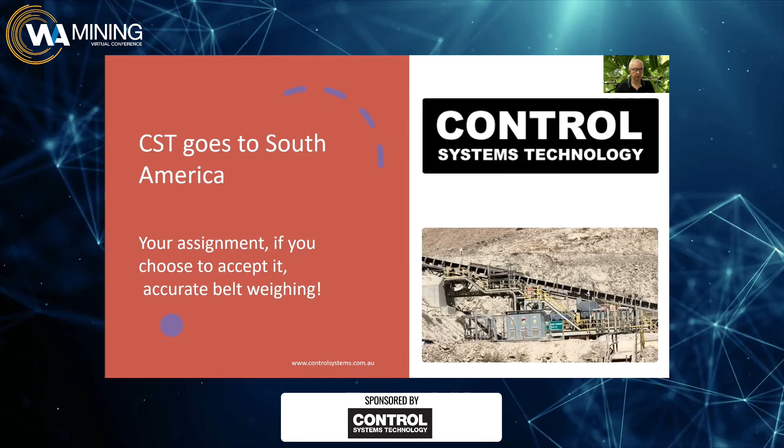On a recent visit to a copper mine in South America, we learned of an accounting problem at one of the many large copper mines there. The mining company had no confidence in their existing belt weighing equipment and asked if we could help.

Actually, as soon as I saw their conveyor, I knew they had a problem with belt weighing. Their conveyor was very long, with high lift, and the belt tension had to be very high and variable. A real nightmare situation for an accurate belt scale.

The mine personnel said that they were at their wits' end with the equipment. It was apparent that they were not getting any assistance from the supplier. We were invited to analyse the existing equipment.

The conveyor is 473 metres long with a lift of 71 metres, and due to a vertical curve, the belt scale was located 253 metres from the tail at a vertical lift of 25 metres. At the belt scale location, the belt tension is 31 tonnes. This is a very difficult location for a belt scale.

To illustrate the difficulty of the location, note that given the 1,000mm idler spacing, it takes 31 kilograms of weight on the conveyor to deflect the belt by 1 millimetre. Since the weigh frame only supports about 2,000 kilograms, this would represent an error of about 1.6%.

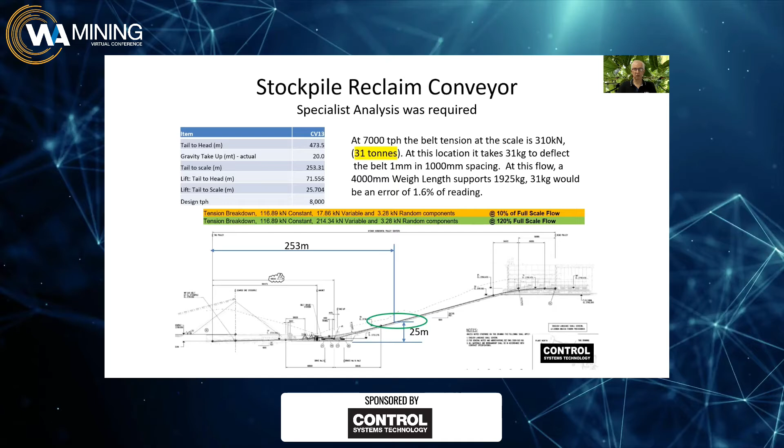The customer belief was that the belt scale had a bias or systematic error of up to 4%, and this is a long way out for a 0.25% system. So, as requested, we subjected the existing belt scale to our engineering analysis.

We interpret three components of belt tension: fixed, load variable, and random, and we interact them with three components of belt scale misalignment: fixed misalignment from the installation standard, load variable misalignment from weigh frame deflection under load, and random misalignment from roll out of round. Our calculated error was 1.7%, in the order of 10 times worse than the customer's expectation.

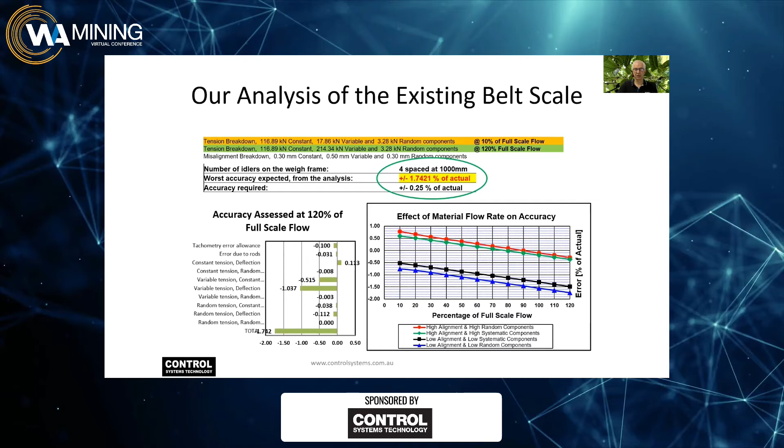We were also requested to design the alternative equipment, which actually had to be located even further up the conveyor in a still worse location, so that the existing scale could be compared. We ended up proposing a 4-idler scale, with each idler set spaced at 4,500 millimetres, some 4.5 times longer than the standard spacing on the conveyor.

This would be a highly unusual custom designed belt scale with a weigh length weight of 10 tonnes, 5 times more than the existing scale. The new unit, taking into account the weigh frame weight and the long idler spacing, is more than 20 times more stable than the existing unit.

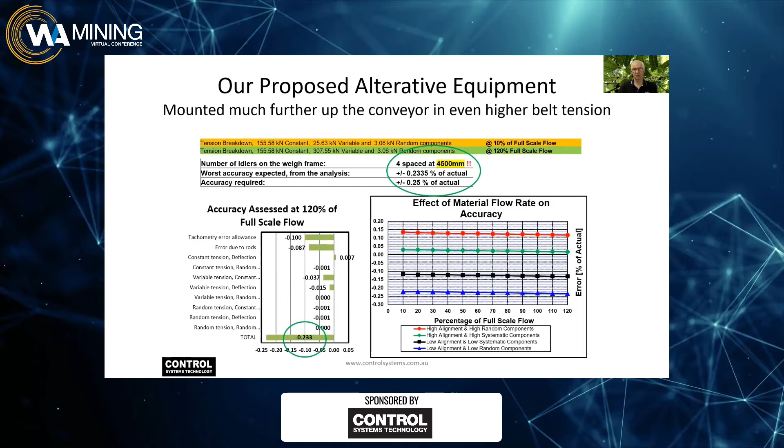But 4,500 millimetre spacing, how is that possible? The fact is that if belt tension is very high, then idler spacing can be very wide, depending upon roller bearing size, of course. However, CST has a patented design which facilitates long idler spacing by providing very good belt support. This is our close-spaced roller rack, or CSRR, as shown.

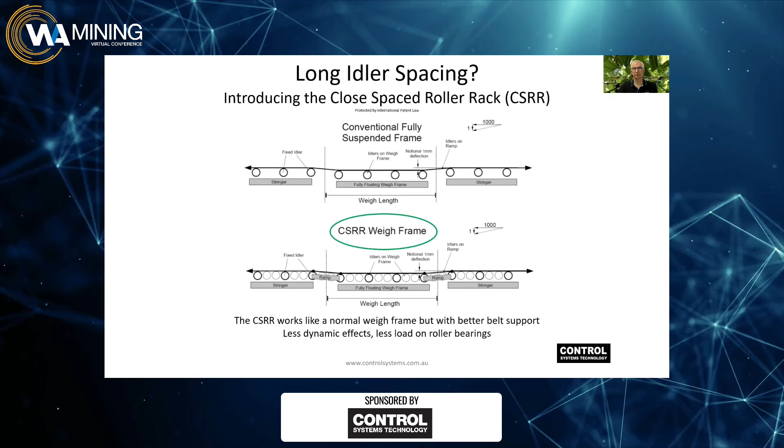The belt has extra horizontal rolls between fully winged sets, in this case spaced at 4,500 millimetres. The CSRR combines the benefits of good belt support and long equivalent idler spacing. At the same time, wing roll loading is acceptable, and we have years of experience to show that the system works well. And this is the unit we proposed to the mining company.

A relatively large belt scale with 10 tonnes of calibration mass and a weigh length of 18 metres. Definitely a sizable unit. It has to be supported on 4 load cells, each with its own little hip roof. All of the 4 full idler supports has 2 calibration masses of 1.25 tonnes each. We were able to get an order for this equipment.

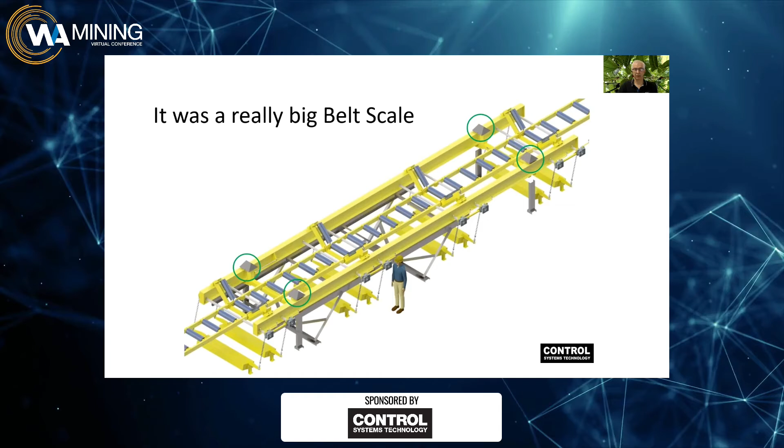However, we had already been thinking about ways to improve the design. The first proposed weigh frame design had very low deflection at the ends, but more deflection near the middle, and the steel sections were likely to make maintenance difficult.

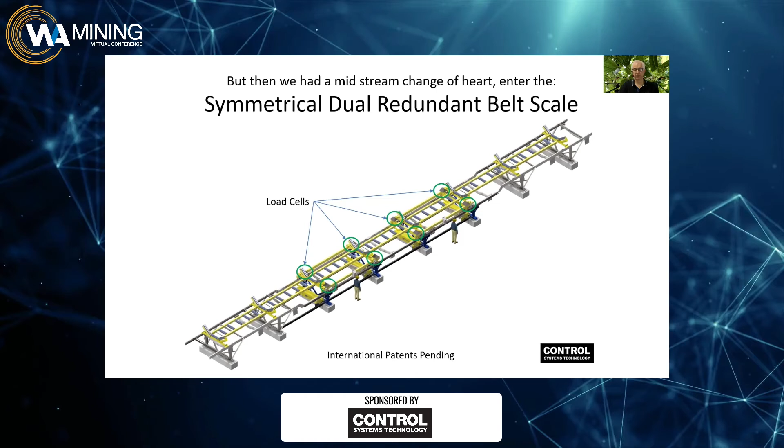So we revised our design midstream and ended up providing a symmetrical pair of belt scales with very small deflection at the far ends and less deflection in the middle than with the previous design. Our system now had 8 load cells instead of 4 and could be configured either as one scale or as a dual redundant pair. So the alternative design is much more open and maintainable.

It has the calibration masses applied directly to the idler sets. Each mass is split to allow a 50% linearity test. We did not linearize against static mass. We only linearity test to prove weigh frame health.

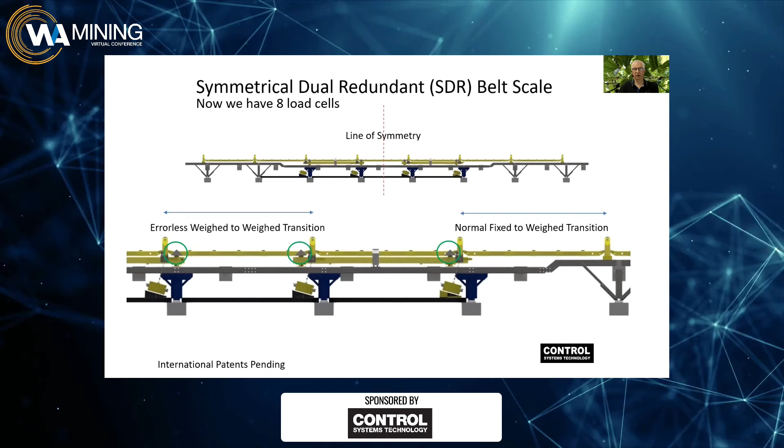The design has the added advantage of offering dual redundancy, and the weighed-to-weighed transition between the 2 weighframes is an errorless internal force. The CST electronic system is able to accept 8 load cells, either as 2 individual inputs or grouped as 1 belt scale.

We retain the option to configure the system as 1 belt scale or a redundant pair. As you can see, on our electronics, there are 2 independent sets of terminals for the 2 weighframes, and each is also able to have its own tachometer.

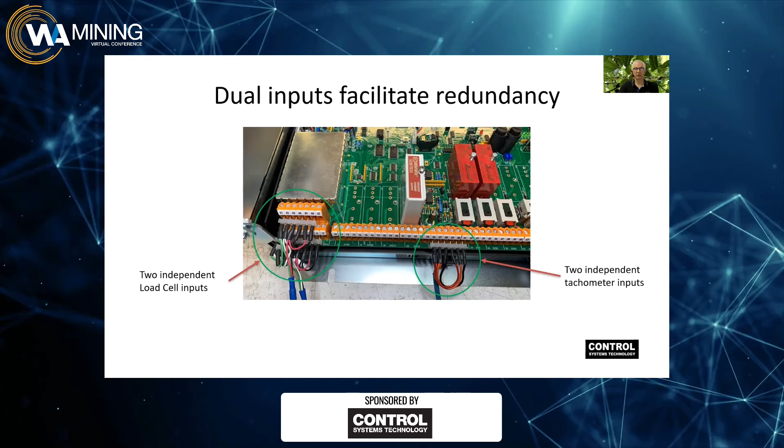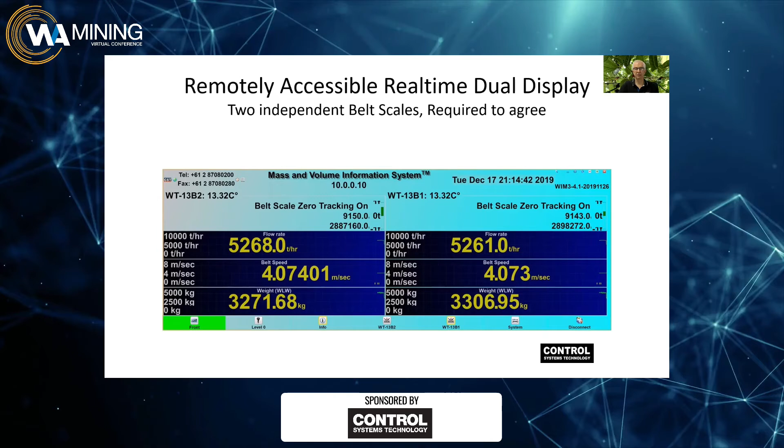And this is what the front panel looks like. This is the remote display captured from my own PC in Sydney via a 3G modem from site. Each belt scale has its own display and setup data. We have complete remote control for maintenance and troubleshooting via a secure VPN tunnel and a custom PC client.

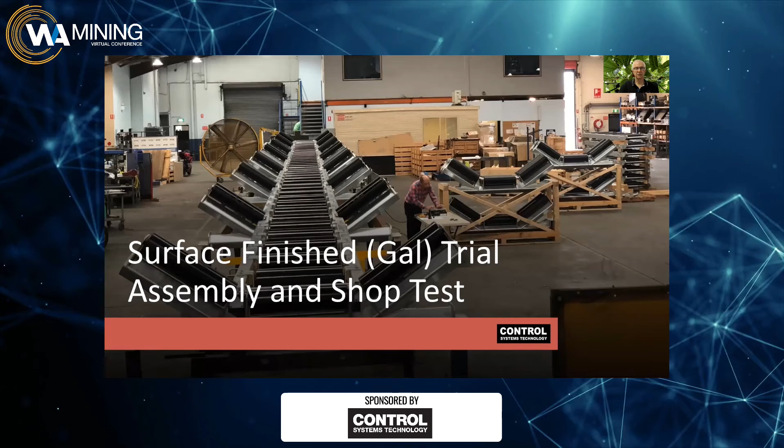So we put the order for this equipment through our Revesby, Sydney factory, where we produce both mechanicals and electronics. Here the project is seen at the first trial assembly stage, and the system is assembled again after surface finishing, which in this case was galvanizing, and then is performance tested with its own electronic set. And finally, it's time to pack the system into a 40-foot container.

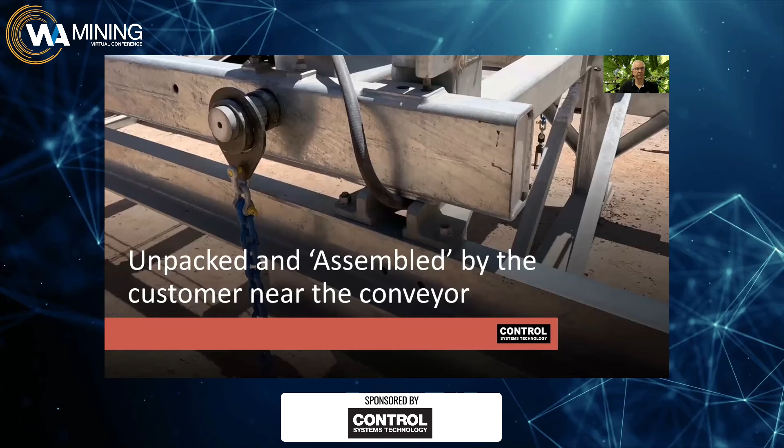The equipment was delivered to a South American port, unpacked out of the container, and trucked to site, whereupon it was again assembled into modules for lifting into place. The equipment was removed from the container at the port, and we were pleasantly surprised to find that all the parts made it to site intact.

This was quite an important installation for CST, and we normally provide our own installation supervision team. This is a large job and time was short, so it seemed that at least 2 of our technicians should be available at all times during the 48-hour shutdown. There was an argument for at least 4 people to cover the 24-hour operation. In this case, we provided 5 of our Australian citizen specialists, including myself.

First, we all had to have 6 days of safety inductions on top of a 2-hour medical, which checked everything from blood type to intelligence. The inductions were interesting since they were conducted totally in Spanish, and we had to pass 2 tests every day. Fortunately, 2 of our team speak Spanish, and we managed to pass the tests.

The inductions were necessary, otherwise we would not have been able to be within 1 metre of the conveyor, and otherwise we could not have made any manual adjustments ourselves.

Then to enter site, we had to have our tools catalogued. The rule was that everything we took on site, whether an iPhone, a computer charger, mouse, screwdriver or spanner, could not be taken off-site again unless it appeared with serial number as appropriate on a signed-off list. It is actually much easier to work on Australian sites than in South American sites.

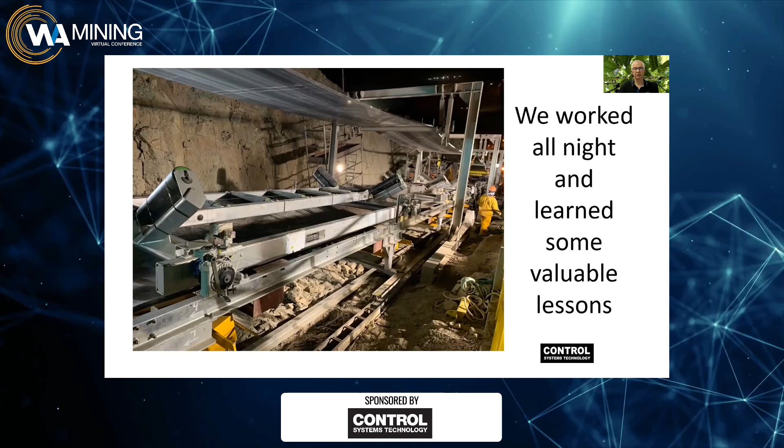The installation was conducted over 2 consecutive 48-hour shutdowns. The safety standard was extreme, even to the extent that anyone working in our own cubicle had to wear special electrically rated boots. But some aspects, such as fatigue management, were less stringently controlled.

Our team are mainly concerned with the all-important alignment, and while there was considerable communication and coordination problems, we got the job done. Commissioning and calibration came at the end of the second shutdown and was relatively uneventful.

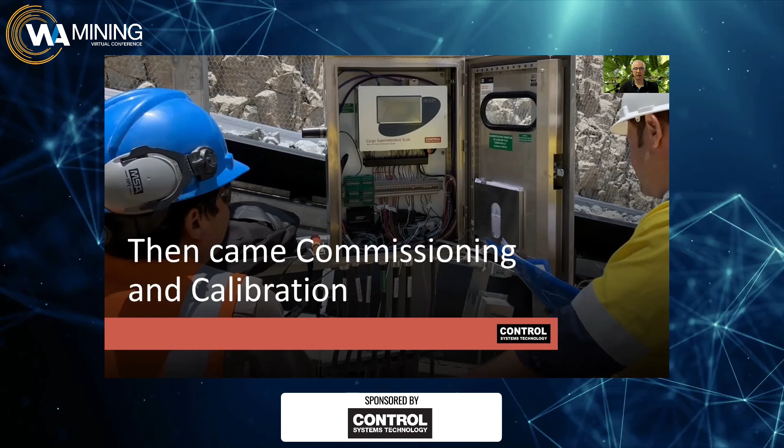The 2 halves of the system were calibrated completely independently. There is no plan to recalibrate the system in the short term, since the calibration will be stable for years. The system became operational early December 2019. We were lucky to have timed this work before the outbreak of COVID-19.

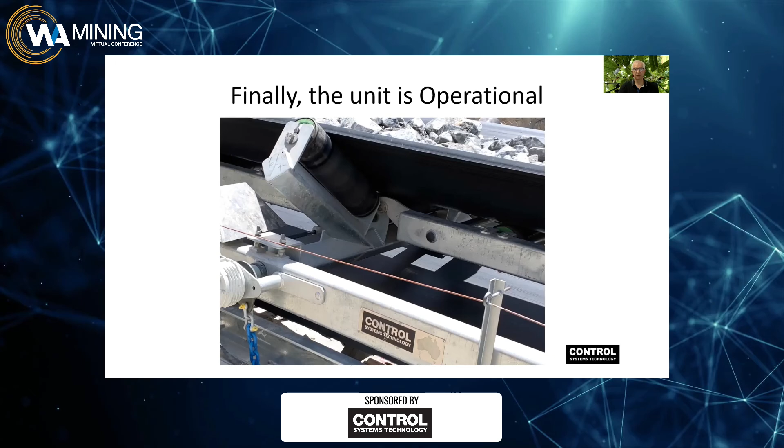Since commissioning, we've been able to remotely monitor the system via a secure VPN connection. By way of summary, these are the extra benefits which we provided to this customer beyond their initial requirement, which was simply for a 0.25% belt scale.

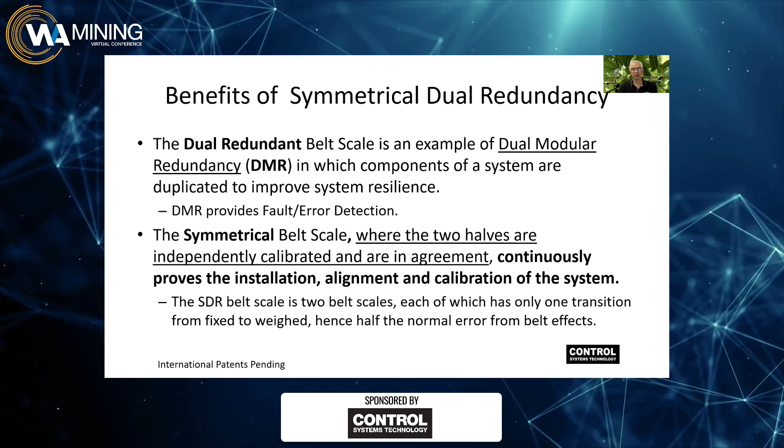The symmetrical dual redundant system is a form of built-in quality assurance. Since the 2 halves are not fudged to agree, they continuously demonstrate the quality of the installation and provide confidence to the customer that there is no bias error.

There is some noise in the data since some days had very small deliveries, and also no provision was made for the amount in transit between the 2 weighframes. I want to repeat that the calibration of this system will remain stable for several years without adjustment.

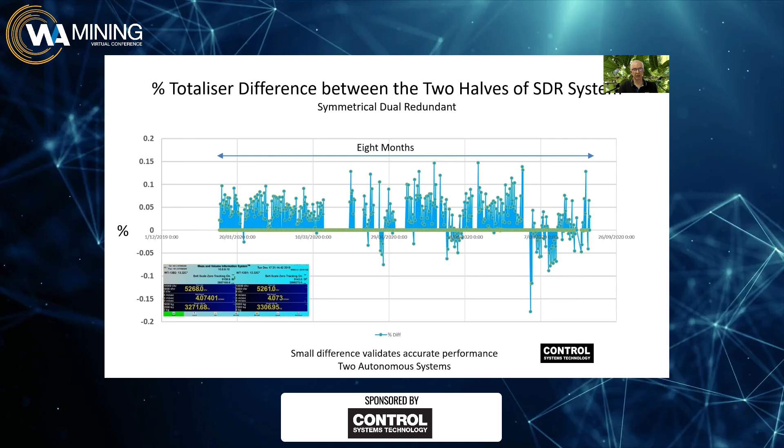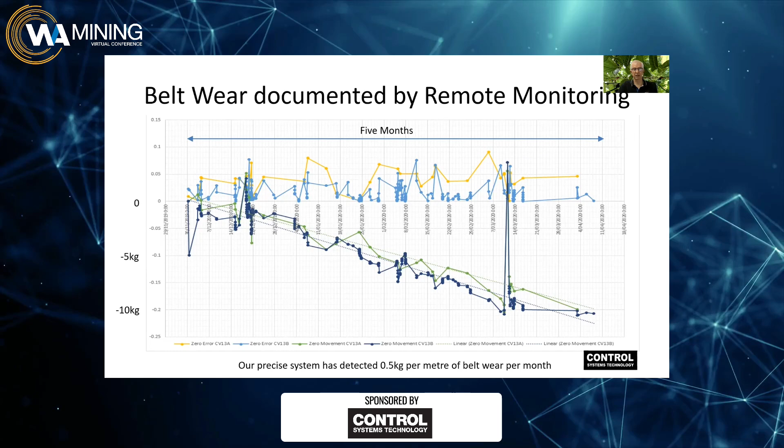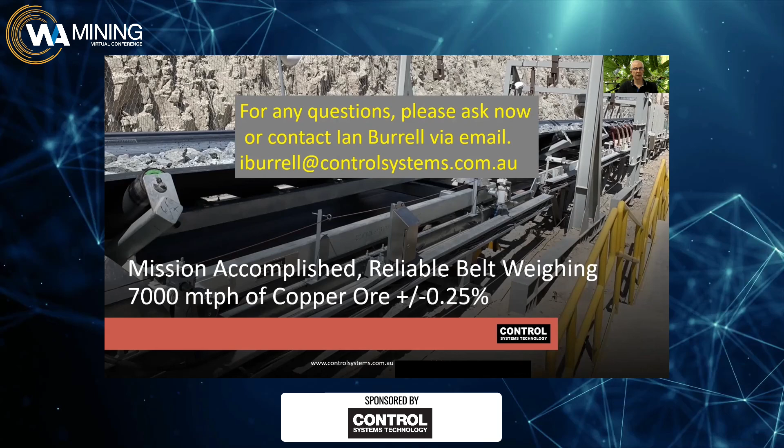This concludes our South American adventure. The customer now has a belt scale that they can have faith in. If you have any questions, please ask them now or send me an email.

Fascinating presentation, Ian, and thank you for that. How many of those types of installations have you completed around the world? Thank you for the question, Rick.

That one is a bit unique, so there's only one exactly like that, but we have similar installations with dual redundancy in Australia, in Townsville, for instance, and we have also sold another similar system into South America recently. It's just a new thing for us, and we're always developing something new, I guess.

And so your focus is obviously Australia and Latin America. Are you expanding and getting demand from other jurisdictions as well? Well, for us, copper is the market that we haven't done much with. We have done a lot in iron ore and coal, and perhaps grain and metals, but copper is the thing. So that's our focus now.

Well, with Osvaldo here, we might be able to create some introductions in Chile. So Ian, thank you very much for that presentation.